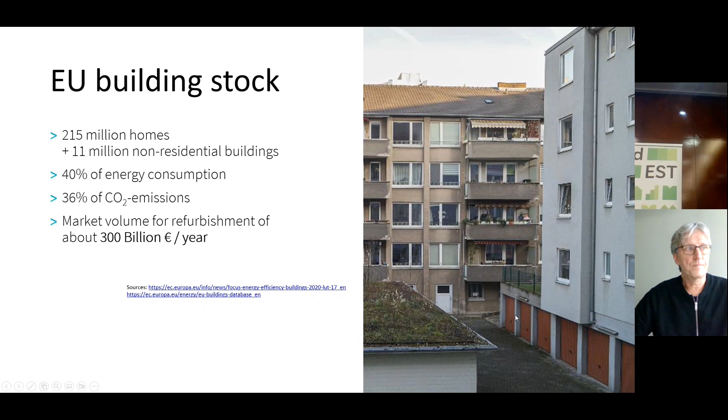We cannot double our skilled workers, that's clear. The whole thing is possible with innovation. What does that look like? Away from these approaches where in individual single projects, individual panels are glued together with long scaffolding downtimes, building services always have to be redesigned. Lots of pipes, lots of screws, lots of mistakes. That's the situation still also in Germany.

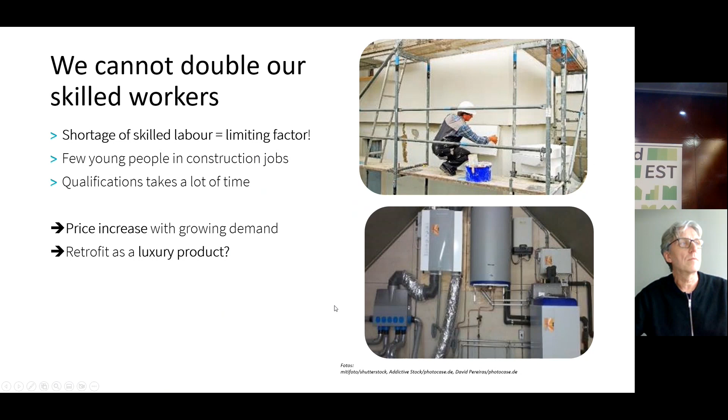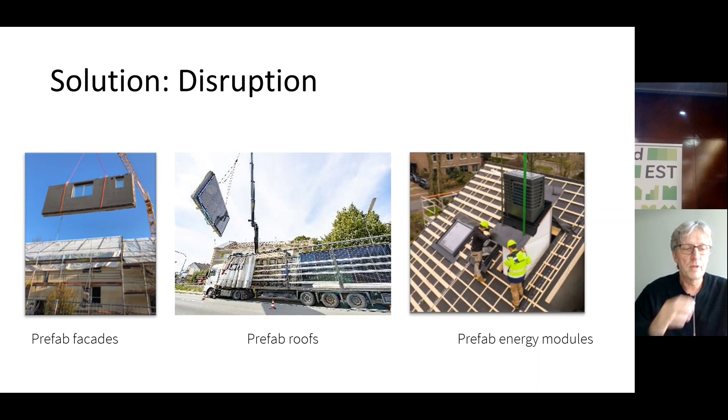The solution is a disruption on the market, and what we need are prefabricated facades, prefabricated roofs, and prefabricated energy modules using renewable energies. And Energiesprong, the idea coming from the Netherlands, is an answer, and the aim is to make it easier, faster, in a good quality, and at least cost affordable, and to scale this up in the next years. That's the challenge in Germany, and I think we have the same situation in Estonia and other countries too.

That this idea works, we can see, with of course differences in different countries. The Netherlands with smaller buildings are quite well developed at the moment. The market is running, while in other countries we are still in the beginning. I here also put in the Estonian example. Maybe you are aware of this building here in Tallinn, and also the next building in Saue. There are some promising examples, but of course this is not enough.

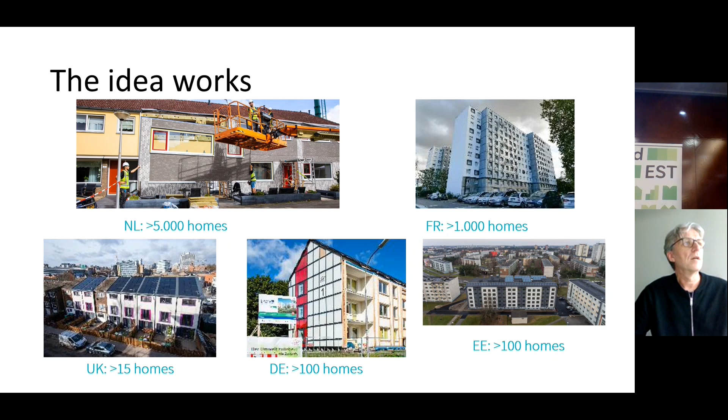Successful factors for the market development are, of course, people. In Germany, the government founded a market development team to inspire the market. This market development team is led by the German Energy Agency. And at the moment, money is coming from different European projects and programs, especially Horizon 2020.

And the policy is still lagging behind in almost all areas, and that means the market development teams have a lot to do also for lobbying this approach in the near future. What Europe can do is finance, for instance, the market development teams, and give financial support.

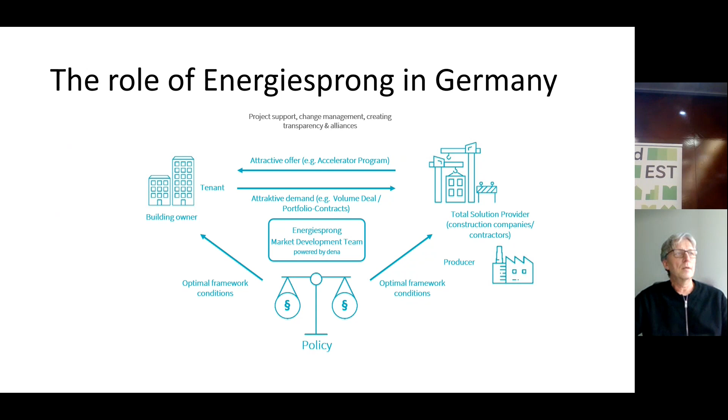There is political support for this in Germany. We have had a German federal subsidy program since last year for serial refurbishment, around 300 million euro. Funding is available for the introduction of this approach into the market. There are different modules. The state covers up to 60% in module 1 and up to 40% in module 2 for the implementation of feasibility studies and the feasibility studies for pilot projects.

And then in the next step, construction companies can get support for the development of components for serial refurbishment, the development of processes, and the production of prototype elements and testing them in buildings. And the building owners can apply for pilot projects, co-financing up to 40% for the energy efficiency measures done by refurbishment, also serial refurbishment components.

The third module is foreseen for investment grants. That means companies establishing production facilities in Germany can get investment grants for new construction facilities or for buying existing production facilities and improving them with regard to serial refurbishment. Companies from abroad can also participate in this program. The only condition is that the building that needs to be renovated and also the investment for production facilities must be located in Germany.

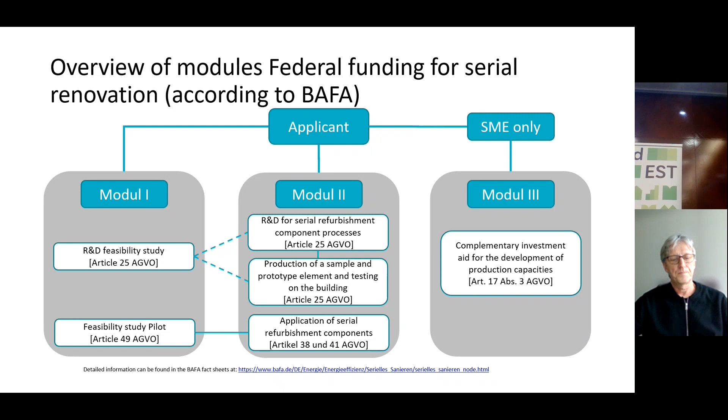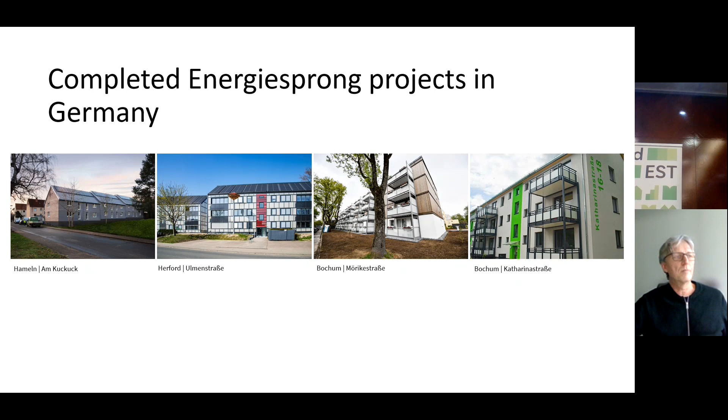There are, at the moment, only a handful of implemented projects in Germany. With this approach, we have around 5 or 6 so-called total solution providers on the market at the moment. And there are different projects under development, especially in the former western part of Germany, where the refurbishment demand is quite high at the moment. There are some 15 projects under preparation. The projects can be visited, and experiences can also be exchanged with Estonia.

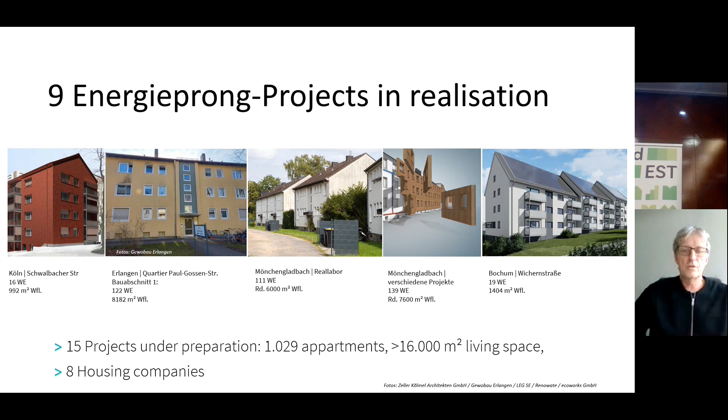In Germany, we of course also observe the Estonian market, and we are interested in what happens there. And I can also give a good example of an Estonian company working in Germany. The company Matek already delivered prefabricated elements to a refurbishment project in the city of Mönchengladbach, and is also very successful in delivering timber elements for wooden hybrid buildings here in Germany with German partners. That's all from my side, and I thank you for your attention.

Thank you, Knut. So I hope you heard the applause. Yeah, thank you very much. It was quite fierce.

So actually, I would start with the questions myself first. What made you come to such a small country like Estonia to collaborate with people and companies here, knowing that Germany in general is a very industrialized and very advanced country in those terms? Maybe what you said is not completely true. Of course, we have a highly developed market, but we are faced with a lack of workers, and this is a completely new approach, and the wooden production market in Germany is not really oriented toward this market. The costs are very high.

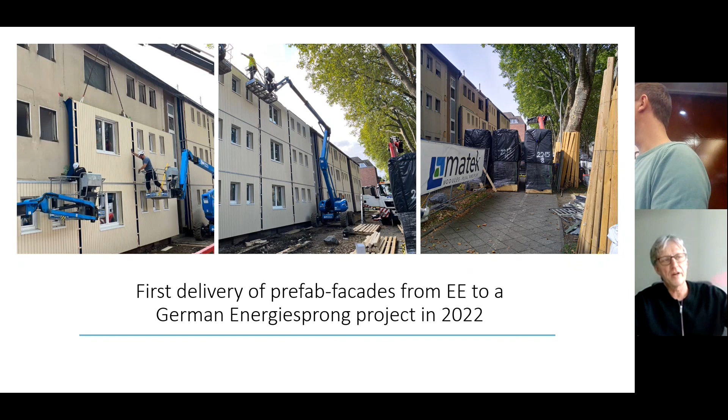I can maybe add that, of course, the first prefabricated refurbishment in a more than 3-story, in a 5-story building, took place in Tallinn, this example, Academias 3. In Germany we are still waiting for first projects with higher buildings, and therefore your experiences are very well acknowledged in Germany so far. Thank you.

If there is no question in the audience, I always like to ask questions. So I ask myself, in your opinion or your experience in Germany, where are the main challenges, on the demand or the supply side, or both? Yeah. There is a high demand and a high pressure from the policy side to increase the refurbishment rate. The housing sector, in my mind, is very conservative, and we have different players.

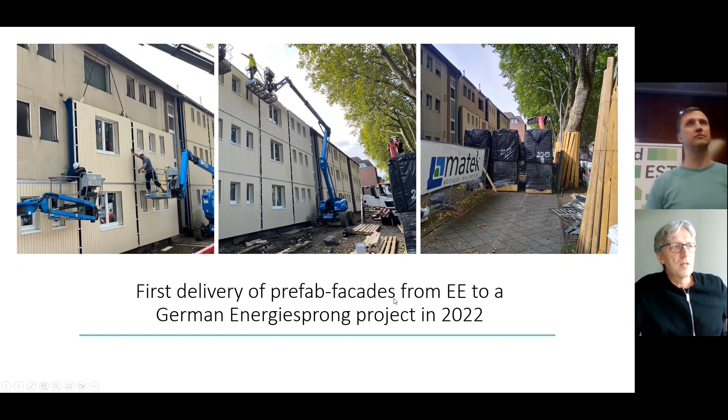They need to pick up the tenants, of course, and the demand side is structured so that you can speak and work with one contact partner. That means the companies themselves. And you do not need to convince the owners of individual and privatized flats as it is in Estonia, for instance. We have also this part, around 10 million homeowners in their owner-occupied condominiums or renting privatized flats, but this is a different sector.

And from the supply side, I think that cooperation with supply partners from the Baltic Sea region, especially from Estonia, makes sense. Also from the cost side perspective, but also to develop innovations together. Yeah, we are thinking that the exchange can be increased so that maybe more cooperations take place in this field.

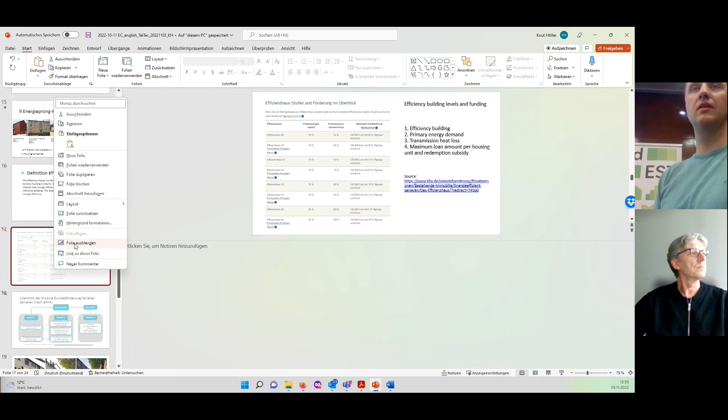Just a second. And the reason why I'm asking is that we more and more here in Estonia hear from the architects and the Association of Architects saying that renovating the apartment buildings shouldn't be just about the energy savings, but it should be about increasing the quality of the built environment in general. The accessibility, the aesthetics, the functionality, all these other related things as well. And I have to agree, unfortunately or fortunately. So.

Yes, we have a quite well-developed regulatory framework. That is the German Gebäudeenergieeffizienzgesetz. That means building energy efficiency law. That's the basic. And then this law is connected with a support scheme. I mentioned the pilot support program for serial refurbishment, but in addition, there is a huge federal support program for energy efficiency in buildings. And there, certain criteria are giving the basis for the support.

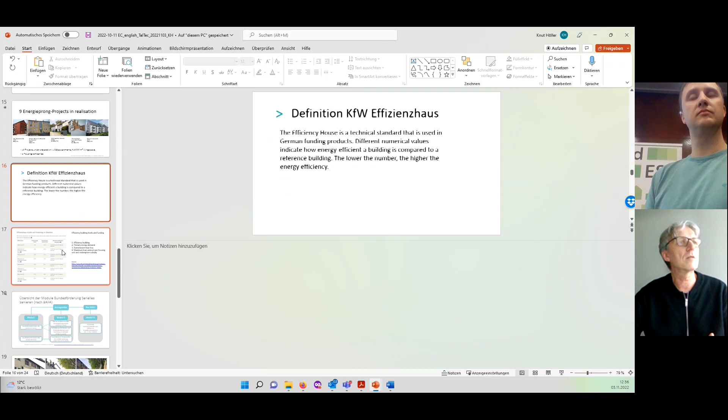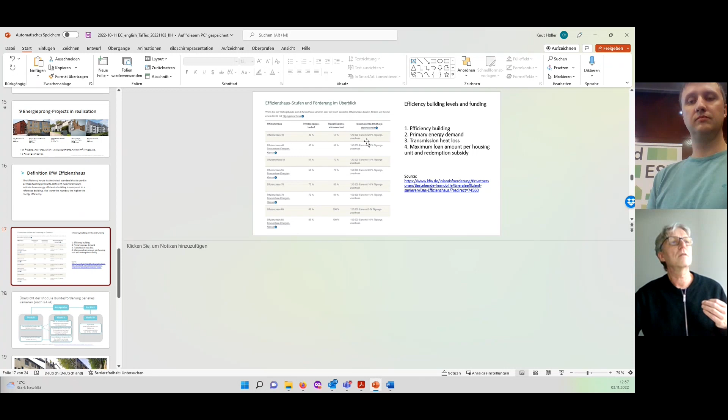And this is the so-called energy efficiency house standard. This is a reference standard or a reference building. And if you get, after the refurbishment, a lower energy consumption than the given reference building standard, then you get a higher support. And this is an overview: for instance, if you get a standard of efficiency building 40, that means the primary energy demand is 40% after the refurbishment, then you can get 120,000 euro and 20% redemption subsidy per flat if you can receive this standard.

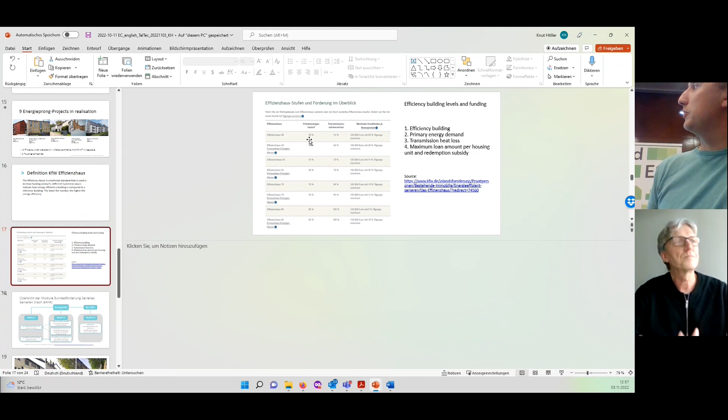Sorry, can you make your slide a bit bigger? A little bit bigger, okay. Just, yeah. So? Trim down the comments part, yes.

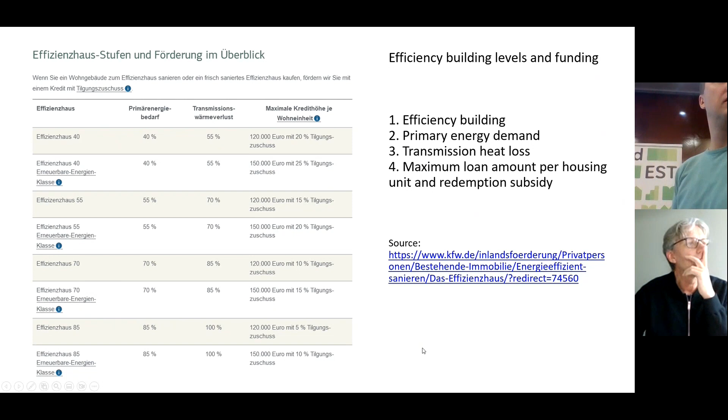Yeah, very good, thanks. This is the overview from the KfW support program, where you can see the correlation between primary energy demand and support. And yeah, that's the main standard. We have a huge amount of money in this funding pot every year, around 15 billion euro. And the refurbishment sector is oriented to use this funding scheme.

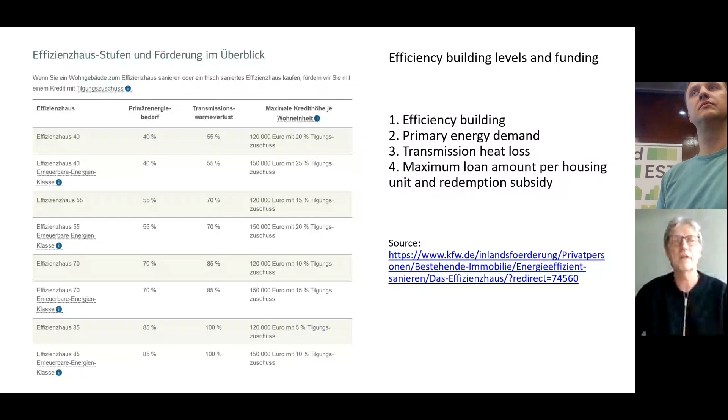Okay, thank you very much. So I'll give the last opportunity to the audience to ask a question. Any questions? Kalle, you? No? Okay. It seems that you have saved 6 minutes of your day from presenting to Estonia. So thank you very much.